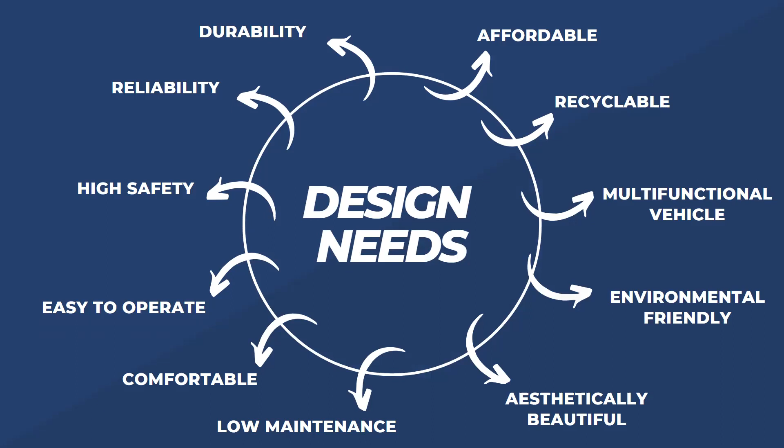So the design needs are durability, affordable, recyclable, multifunctional vehicle, environmentally friendly, aesthetically beautiful, low maintenance, comfortable, easy to operate, high safety, and lastly, reliability. These are all the design needs based on the customer. So we will proceed to the next.

Okay, product design specification. Product design specification is our specification based on the design needs from the slide before. The product design specification will follow the engineering requirements to successfully achieve the design needs. So all the specifications are related to each other. So there will be no component that will not be used to make the project. Only chosen items that we discussed and suggested as the best for our design needs can be used for this product design specification.

So the first one is the ATV must have 45 to 50 horsepower, and the motor type is assumptively an AC motor with 500 to 1000 watt, and the torque value is assumptively 60 to 90 Nm, and the material for the chassis is corrosion resistant, heat and water resistant. And the body material is environmentally friendly, recyclable material.

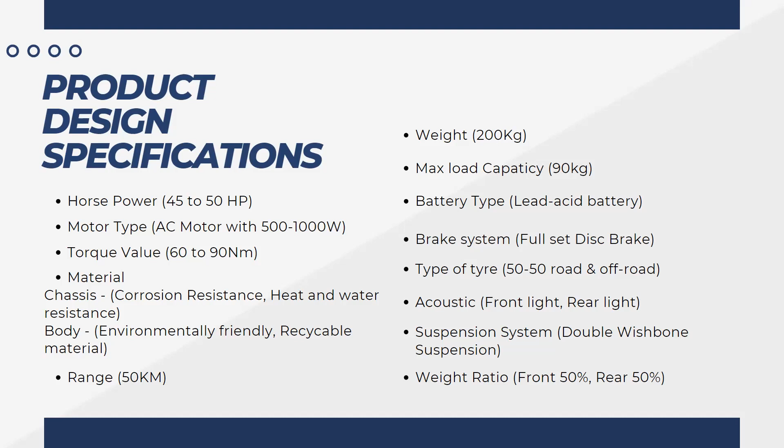For acoustic, we use front light and rear light. For the suspension system, we use double wishbone suspension. And weight ratio, we divide it into two parts. That is front 50% and rear 50%.

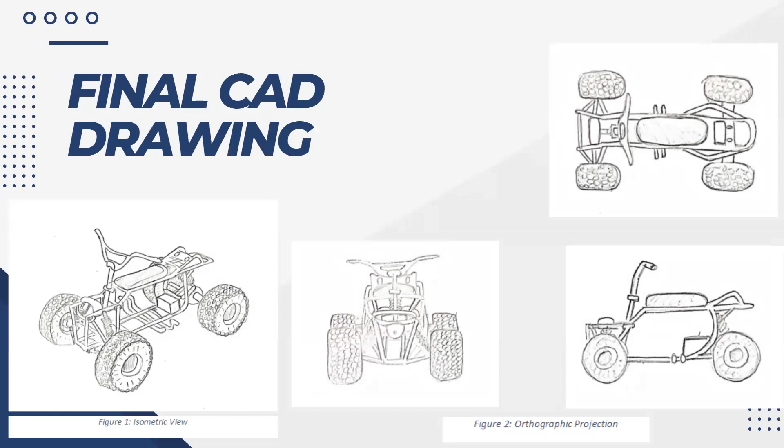This is the final CAD drawing for our project, the CAD drawing for the design that we chose. At the top corner is the isometric view of the final design that was rendered. And at the bottom left is the exploded view of the final design.

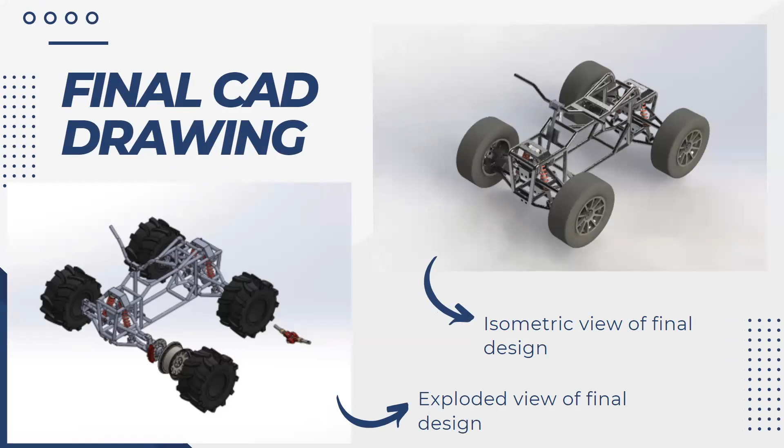We did the analysis using finite element analysis. This is the static load for the project. At the top corner is the static load applied to the chassis. And at the bottom left is the mesh plot for static load on the chassis.

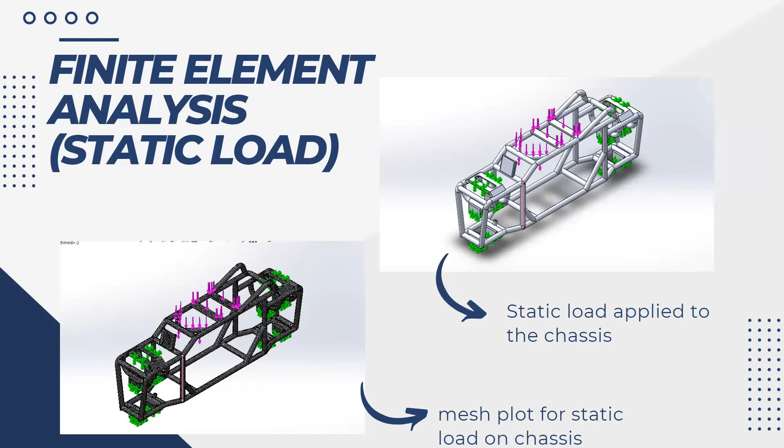This is the von Mises. This is the finite element analysis for static load. The stress effect on the chassis is on the top right. And below is the displacement effect on the chassis. We can see the difference between the two.

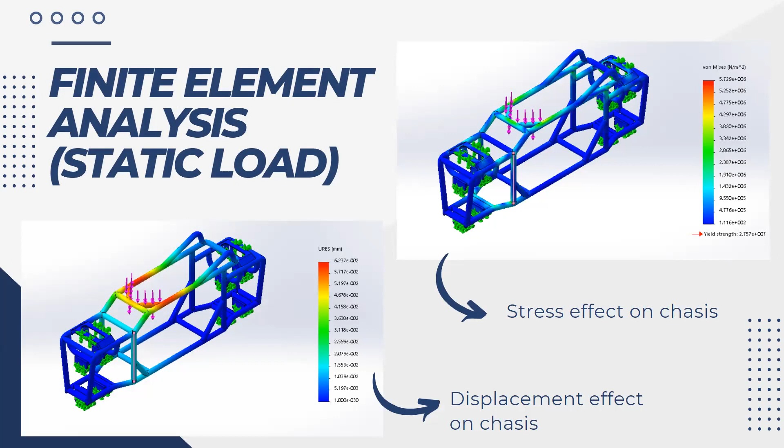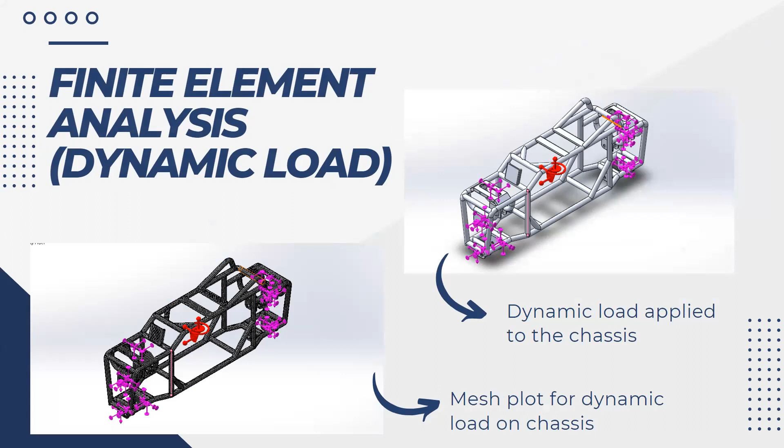Okay, for dynamic load, we can see on the right the dynamic load applied to the chassis. And at the bottom left, we can see the mesh plot for dynamic load on the chassis. This is the effect of stress on the chassis on the right. And on the left, you can see the displacement effect on the chassis.

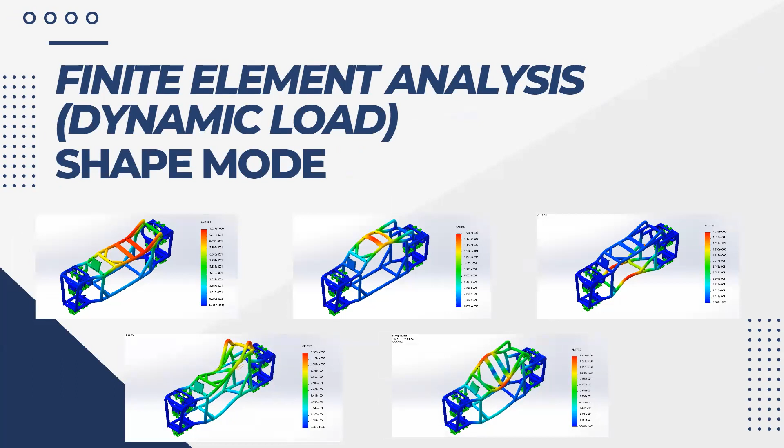This is the finite element analysis for dynamic load in shape mode. You can see the difference between all of it. And this is the motion analysis for the model.